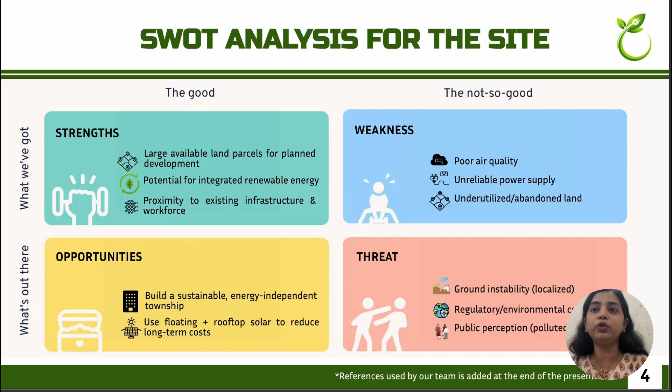This creates a great opportunity to build a fully energy-independent township using integrated renewable energy. There are several facilities like markets and restaurants nearby, but there is a lack of schools and hospitals in the vicinity, so we have decided to build them within the community itself.

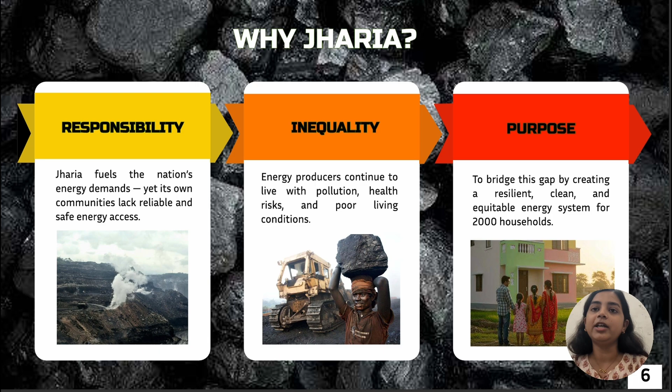So why Jharia? Jharia fuels the nation, yet its own people live in darkness. Those who produce the nation's energy should not have to live with the highest pollution and the lowest reliability. Our purpose is to bridge this gap for 2,000 households.

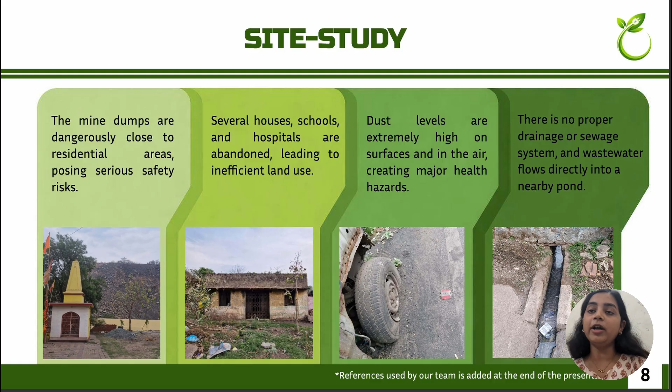Our on-site study revealed critical hazards. Mine dump sits dangerously close to homes. Coal dust levels are at crisis levels on every surface. There is no formal sewage system, and power lines are exposed, aging, and poorly maintained. Most residents still rely on coal stoves, which exacerbate both indoor and outdoor pollution.

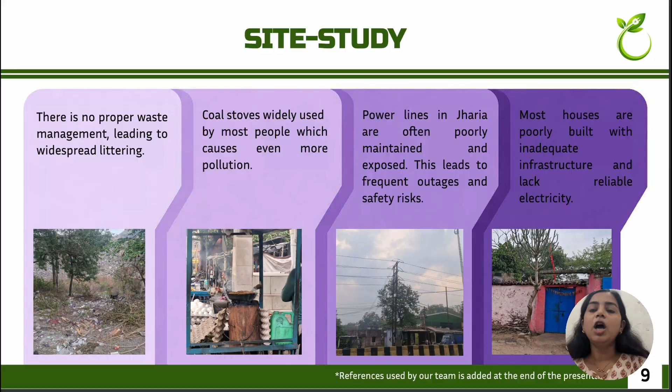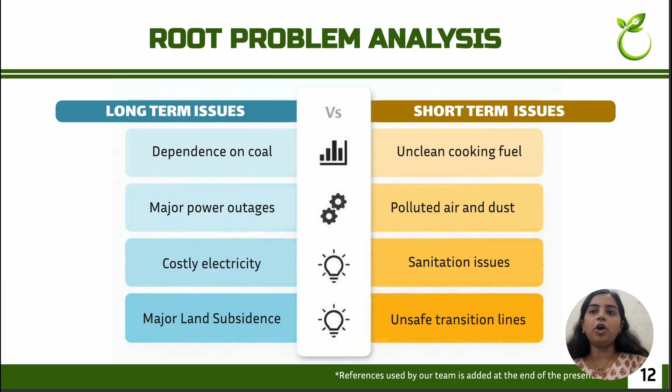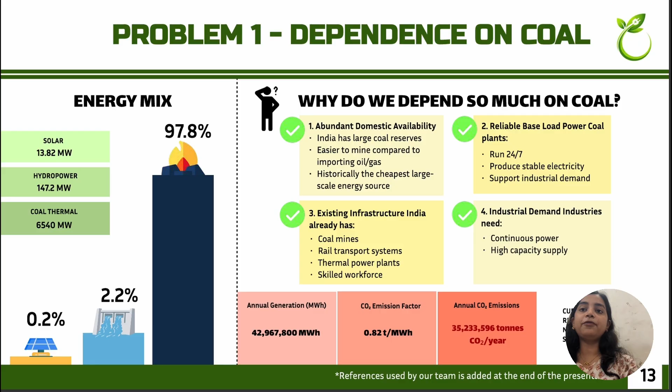Here we have segregated the problems into short and long-term issues. Now let's talk about major problems. Our first problem is coal dependence. Jharkhand's energy mix is 97.8% coal thermal. While coal provides a stable baseload, it emits 35 million tons of CO2 annually in this region alone. We need a gradual, resilient shift towards renewables.

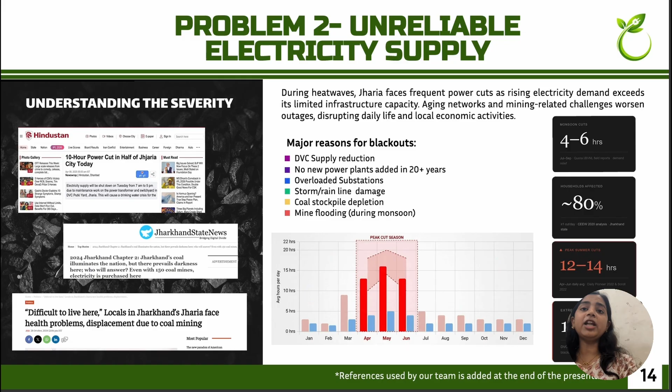Our other problem is reliability. The reliability gap is staggering. During the peak cut season from April to June, residents face 12 to 14 hours of power cuts daily, sometimes exceeding 18 hours during extreme events. We are purchasing electricity while living on top of the world's largest coal reserve.

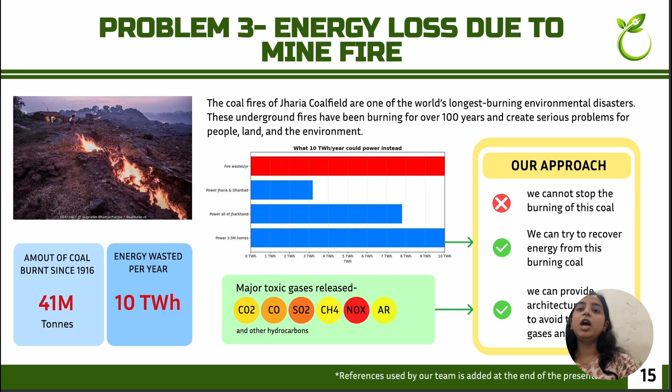Our other concern is energy loss from fires. The Jharia coalfield fires have burned for over a century, wasting 10 terawatt-hours of energy every year. That is enough to power 3.5 million homes. Our approach is radical: we cannot stop the fire, but we can recover energy from it while providing an architectural solution to shield residents from toxic gases.

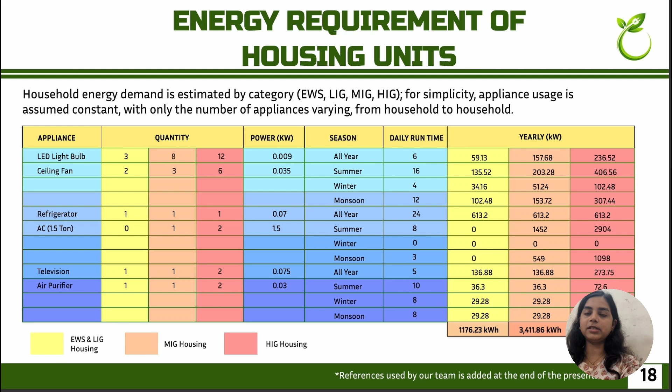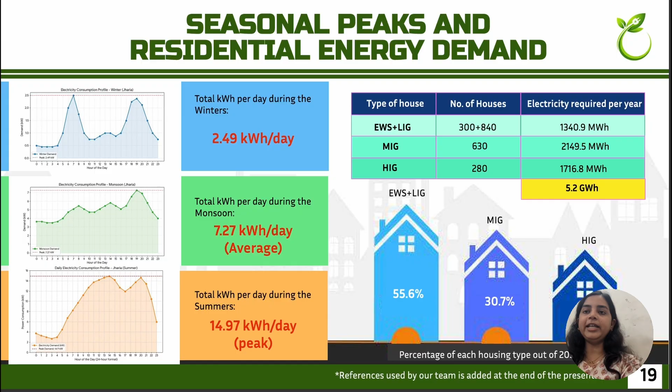Moving on to energy demand, we surveyed several households and found the average use per appliance, then calculated the total demand for the different groups: LIG, MIG, and HIG. The load profile shows demand based on seasonal use. In summer, a single HIG home peaks at 14.97 kilowatt-hours a day due to 1.5 ton AC units. Our total community needs, including essential services like the school, hospital, and water treatment, is 6.463 gigawatt-hours per year.

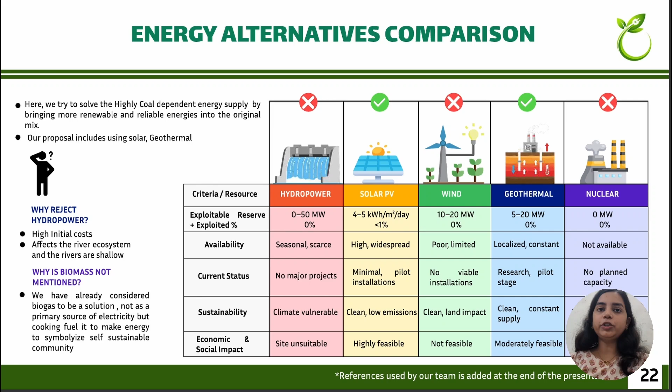Let's see our solution. We rejected hydropower and wind due to site unsuitability. Our proposed new energy basket is a three-pillar system: geothermal, solar, and biogas. Geothermal provides our 24/7 base load, solar provides bulk low-cost generation, and biogas solves our waste and cooking fuel crisis.

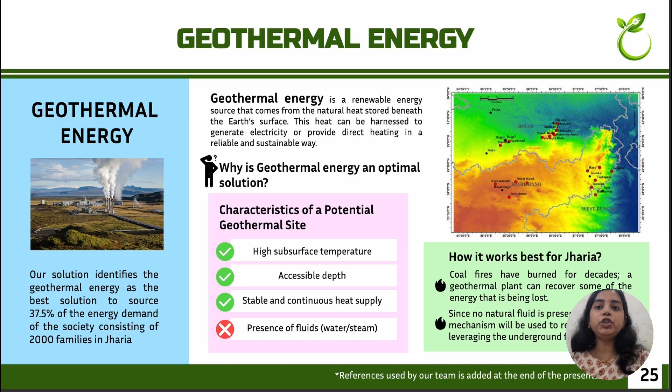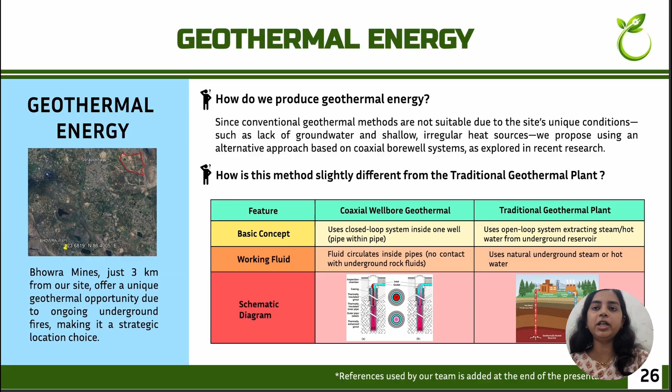Our geothermal solution is site-specific. We have chosen a location 3 km from our site in Bhowra mines. Since Jharia lacks natural underground fluids, we will use a coaxial wellbore system. By drilling a 3050-foot closed-loop pipe, we will circulate fluid to harvest heat directly from the underground fire zones. This provides a 2.25 gigawatt-hour annual supply with 100% reliability and no seasonal fluctuation.

For solar, we utilize a tiered approach: barren land 0.65 megawatt using Waaree panels, floating solar 1.16 megawatt on local pits and lake using dual glass bifacial panels, rooftop 14.1 megawatt capacity on community buildings using luminous mono half-cut solar panels.

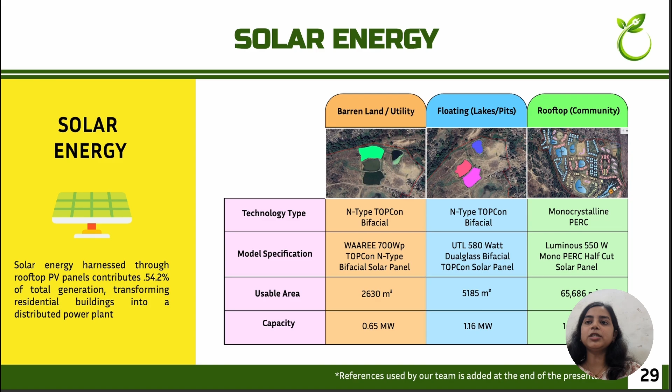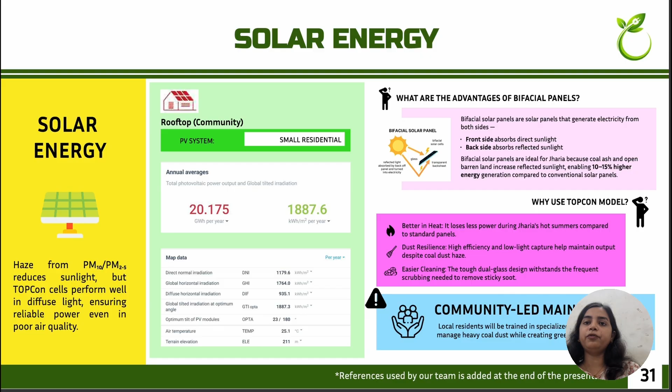In Jharia, bifacial topcon models are essential. They capture reflecting light from coal ash, boosting yield by 10 to 15%, and their dual glass design withstands the frequent scrubbing needed to remove sticky coal soot.

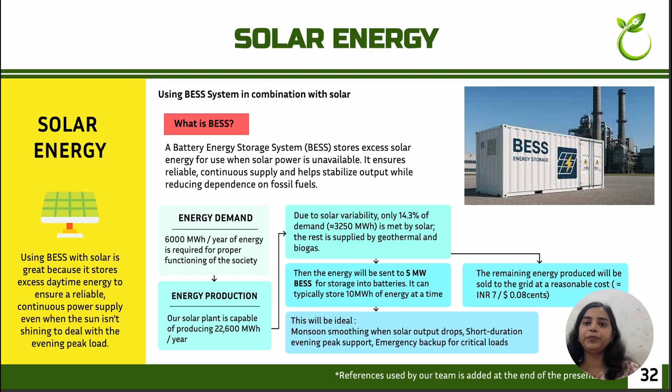To manage solar variability, we have integrated a 5 MW BESS with 10 MWh of storage capacity. This system provides monsoon smoothing and evening peak support, ensuring the community never experiences a blackout again.

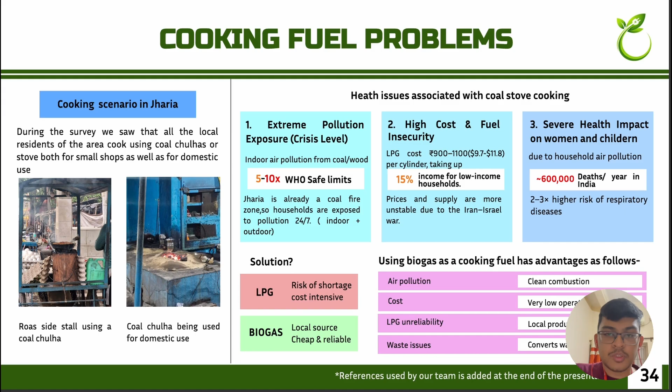Our next solution, biogas. In Jharia, coal chulhas cause pollution up to 5 to 10 times the safe limit, along with high costs and health risks.

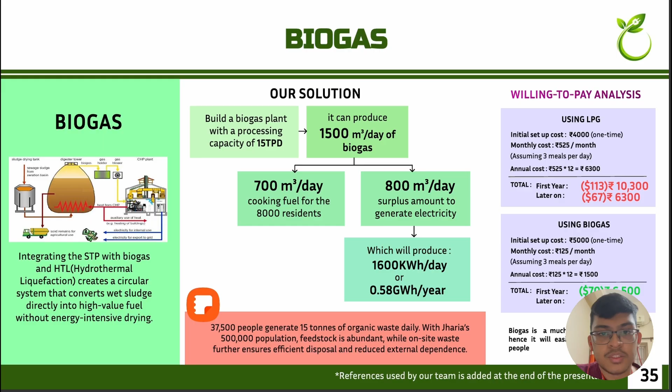We propose a 15 TPD biogas plant generating 1500 cubic meters daily, enough for 8,000 residents. It's cheaper than LPG and locally produced.

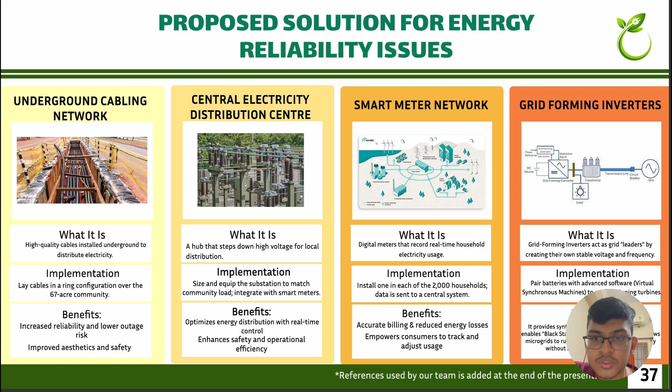Our next solution will involve solving reliability issues. To ensure reliability, we use underground cabling, a central distribution center, smart meters, and grid forming inverters.

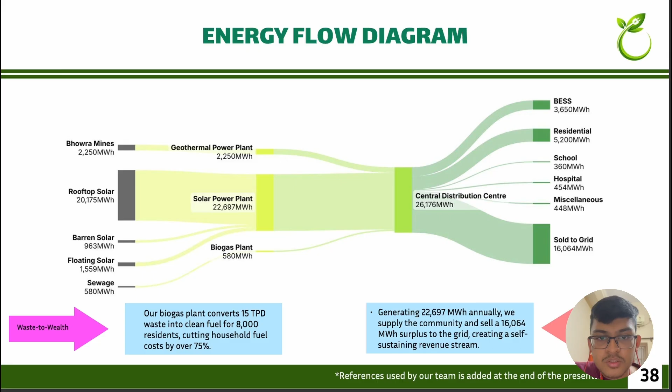Together, solar, geothermal, and biogas power a centralized grid that meets demand, stores excess, and supplies surplus back to the grid. We shall now begin with the next part of our presentation.

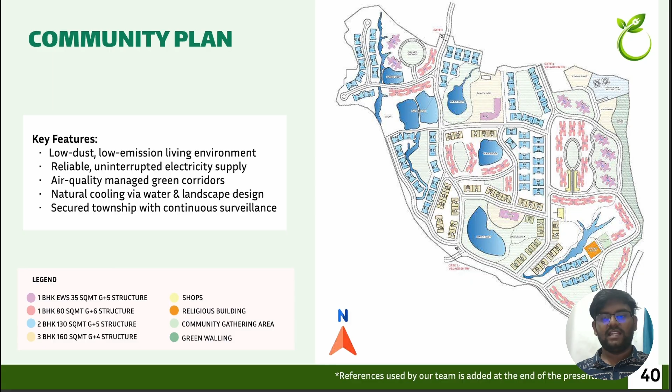Starting with the community plan, we have divided the community into segments: the HIG with 3 BHKs, the MIG blocks with 2 BHKs, the 1 BHK LIG blocks for lower income groups, and the EWS category for the lowest income bracket.

Our mission is to redefine living in Jharia through cleaner environments, safer spaces, and dependable infrastructure.

The entire site has been designed keeping in mind the existing flora and fauna. We have designed and developed the landscape to conserve the existing water bodies and also develop bioswales, so that it reduces the existing ambient pollution and decreases the overall temperature.

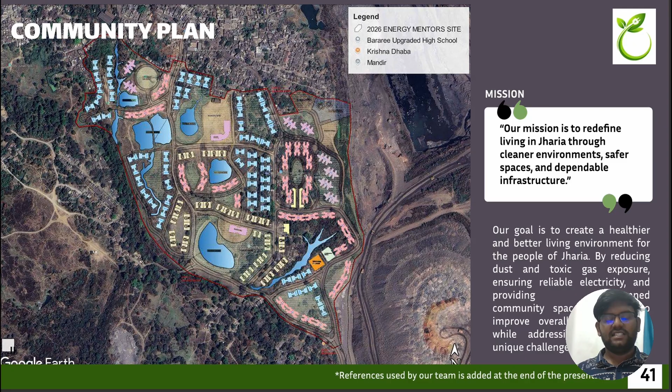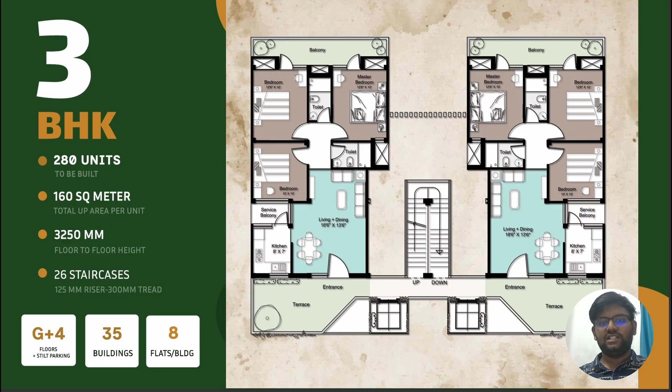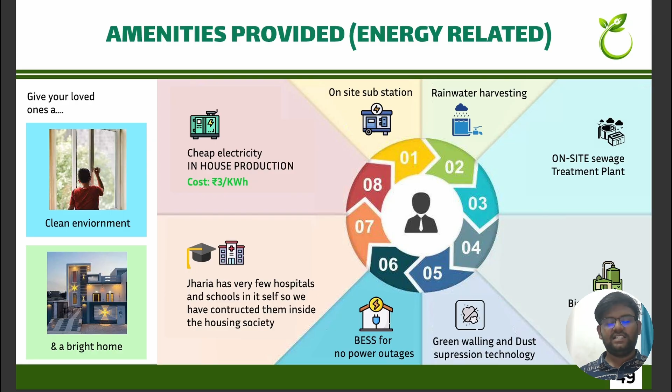Keeping in mind the lack of basic infrastructure across Jharia, we have decided to provide a school, a hospital, cheap in-house electricity production, rainwater harvesting, an on-site sewage treatment plant, biogas plant, and also green walling and dust suppression technology, keeping in mind the adjacent coal fields and dust that comes to the site.

In addition to these amazing facilities, we will also develop a cricket field, playgrounds, community gathering areas, and a shopping complex for the benefit of the residents.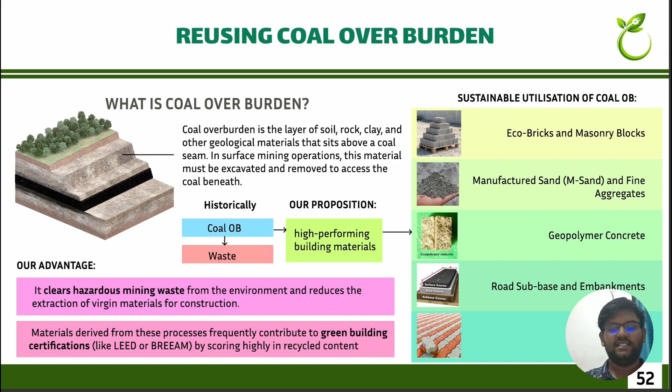Engineering and material design solutions. Our main goal is to utilize coal overburden and convert this hazardous waste into high performance building materials.

Coal overburden can be utilized to build eco bricks or masonry blocks, manufactured sand and geopolymer concrete, or as a road sub-base material and embankments. It helps us clear out the hazardous waste and provide a green alternative to traditional construction materials.

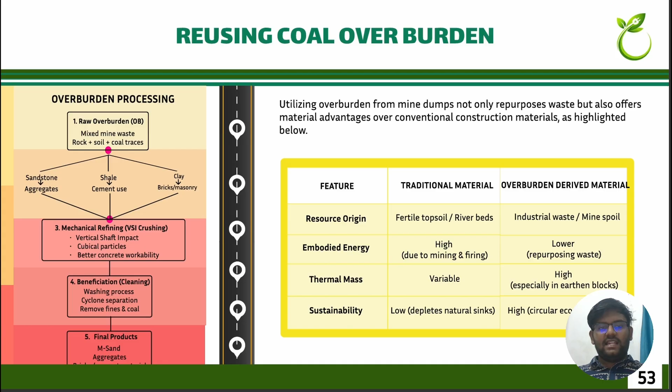Hence, reusing coal overburden gives us numerous benefits by repurposing the waste to be utilized in material constructions. They have lower embodied energy, higher thermal mass, and rank high on sustainability.

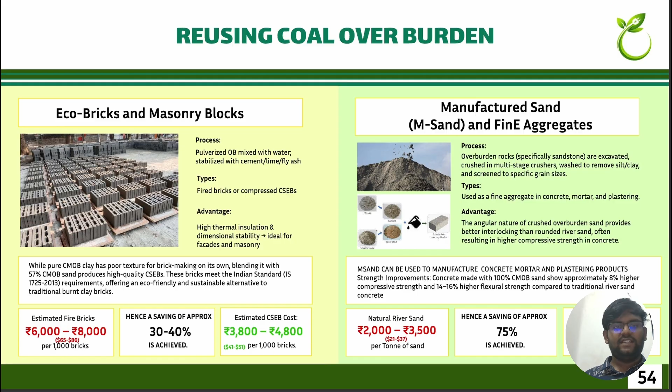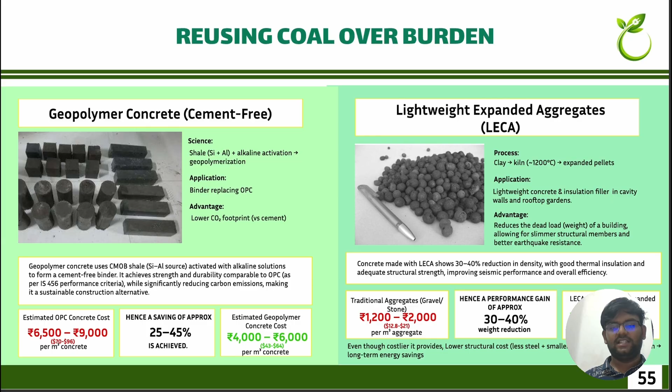They can also be used in geopolymer concrete as a binder or as lightweight expanded aggregates. This reduces the dead load weight of a building. LECA materials are used as filler materials, providing 30 to 40% weight reduction and helping in areas with high seismic activity.

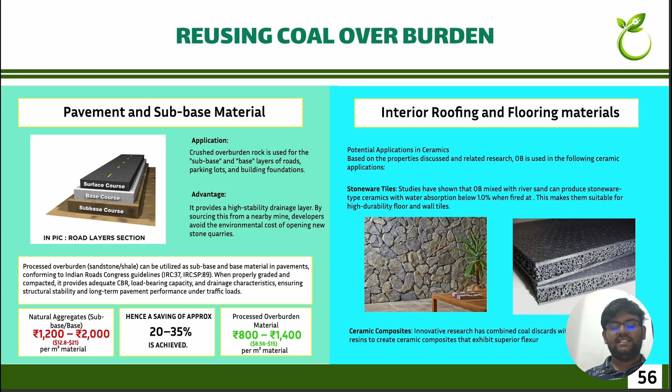Overburden can also be used as pavement or sub-base materials during road construction, or in interior roofing and flooring materials. Stoneware tiles and ceramic composites can be made with overburden.

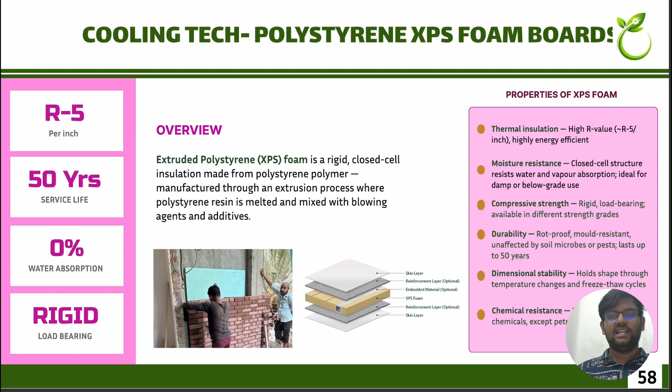Keeping in mind the hot and humid climate of India, we have utilized passive cooling strategies such as Persian wind catchers, XPS polystyrene foam boards, and double glazed glass windows. These reduce the ambient temperature by 5 to 10 degrees without utilizing any electricity.

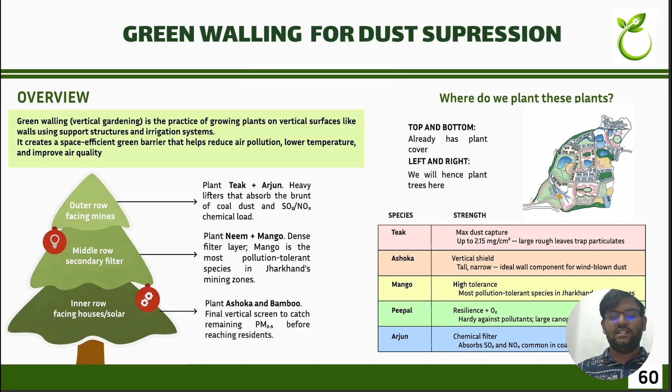We have also provided green walling for dust suppression by utilizing local species of trees such as teak, ashoka, mango, peepal, and arjun. They are heavy lifters that absorb the brunt of coal dust and chemical load that might come to the site from the nearby coal mines.

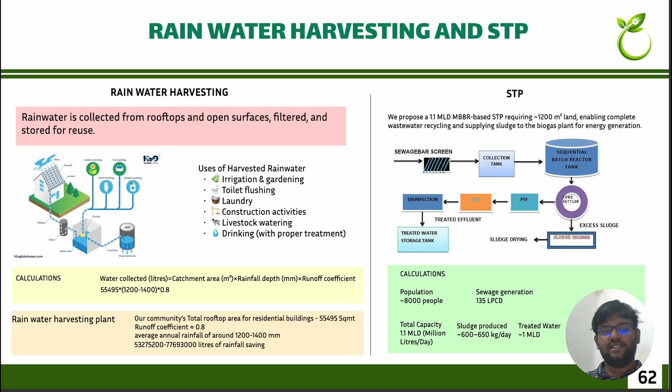Our goal is to utilize rainwater harvesting to the fullest extent. All the water that we save reduces our requirement for external water, and this water can also be utilized for site specific services such as cleaning or watering the plants.

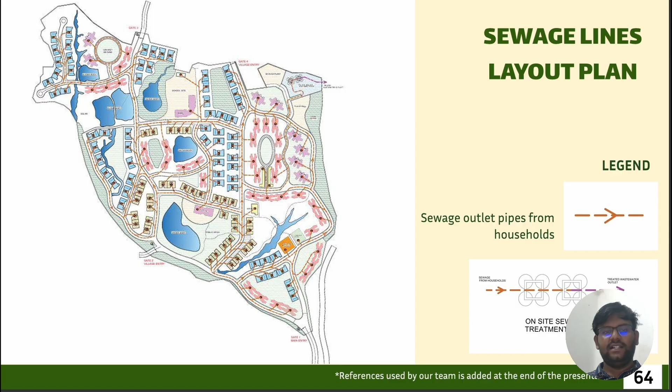Rendered images and building features.

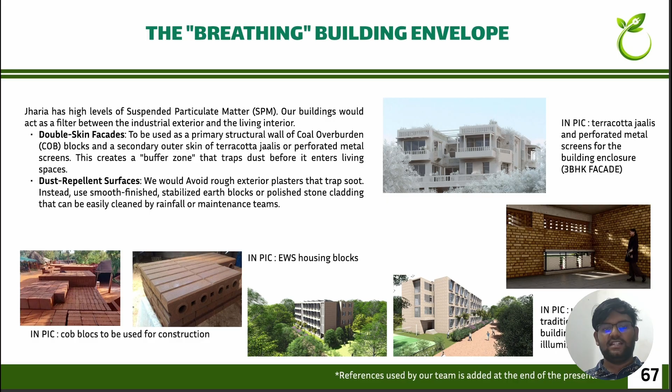The breathing building envelope. Jharia has high levels of suspended particulate matter. Our buildings would act as a filter between the industrial exterior and the living interior. Double skin facade and dust repellent surfaces have been developed for this exact issue.

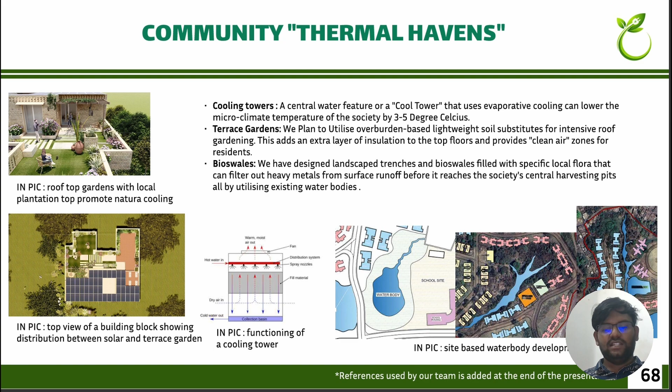Coming to the community thermal havens, we have provided cooling towers, terrace gardens and bioswales. We have preserved the existing site water bodies to increase the living conditions and provide better air quality.

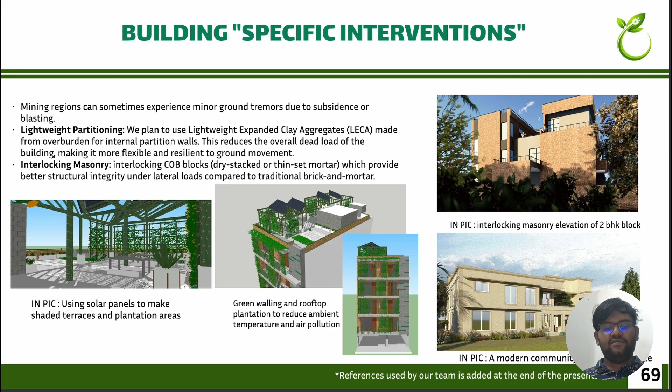Coming to building specific interventions, mining regions can sometimes experience minor ground tremors. Hence, lightweight partitioning made of LECA and interlocking masonry with COB blocks helps us provide better structural integrity. Also, we have used solar panels to make shaded terraces and plantation areas, which reduces the dust on our site.

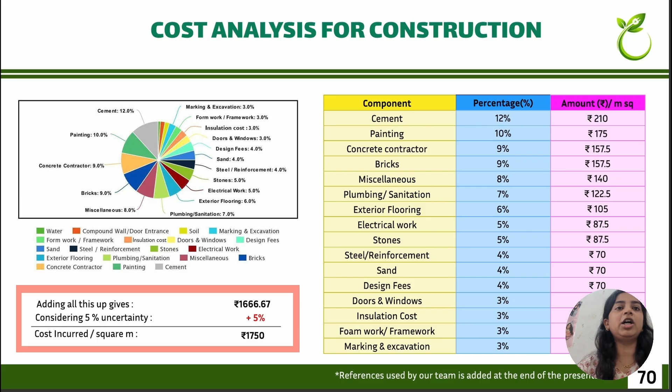Let's look at the cost analysis for construction. We have achieved a lean construction cost of Rs 1666 per square meter. Even with a 5% uncertainty buffer, our final incurred cost is competitive at Rs 1750 per square meter.

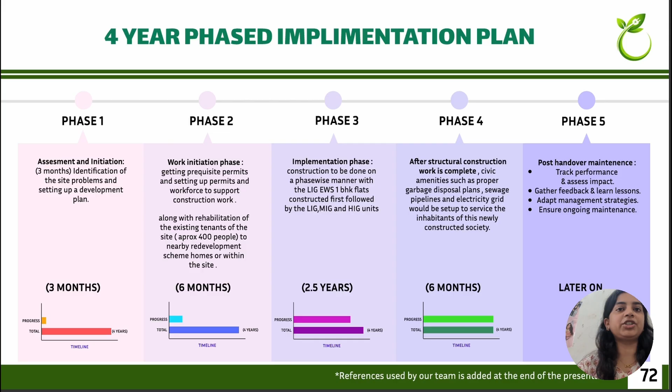Our 4-year roadmap includes 3-month assessment, 6-month initiation with permits and tenant rehabs, and a 2.5-year construction phase prioritizing EWS housing first, followed by LIG, MIG, and HIG.

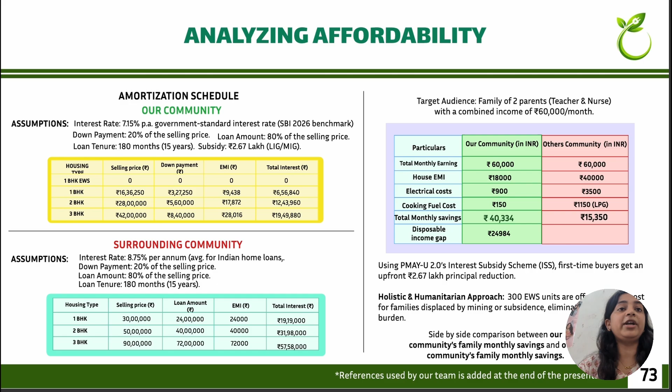By eliminating the debt burden for these families in Jharia, we bridge a disposable income gap of nearly 25,000 compared to surrounding communities. While surrounding areas face 5 to 7 hours of daily power cuts, our community will have zero outage through an integrated backup system.

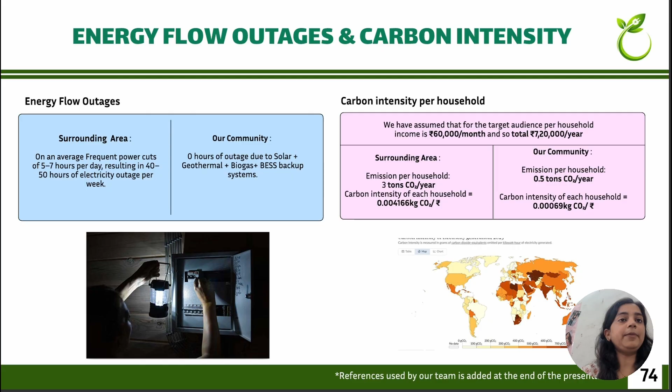We cut carbon emissions by over 90%, eliminate diesel generators, and reduce indoor PM 2.5 by 95% by switching from coal to biogas, bringing air quality close to the WHO safe limits.

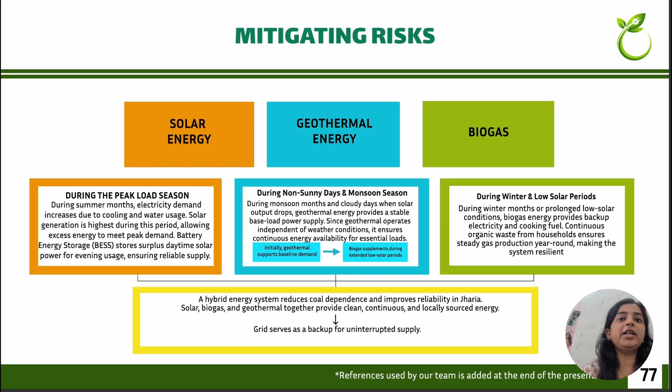Our reliability stems from a hybrid energy system. We use solar for peak summer loads, geothermal as a stable weather-independent base load, and biogas as a year-round backup and cooking fuel. This triple redundancy ensures a clean, continuous and locally sourced energy supply.

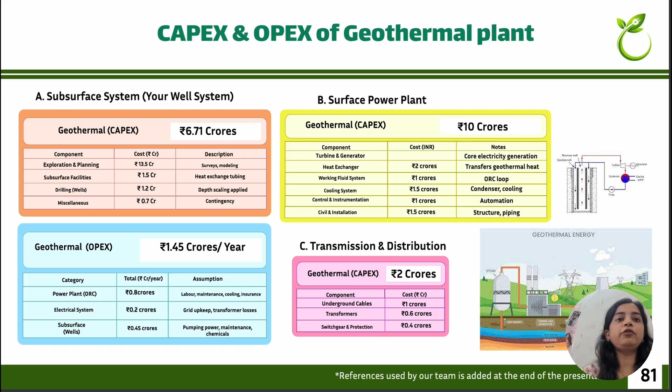Financially, the project is robust. Our utility capex is Rs 116 crore, covering a 47.5 crore solar plant, a 20 crore STP, and our geothermal and biogas facilities. The construction of 2050 house units represents a 364 crore investment.

We have also factored in essential community infrastructure, including a 17.9 crore school and a 17 crore hospital. Our diversified revenue model generates 13.35 crore from electricity, 12.2 crore from the school, and 9.6 crore from the hospital.

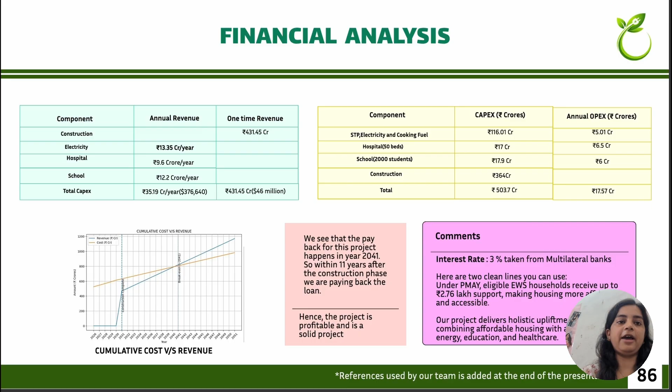Annually, with a 3% interest rate, the project breaks even by 2041 and repays its own loan within 11 years, demonstrating both social impact and financial viability.